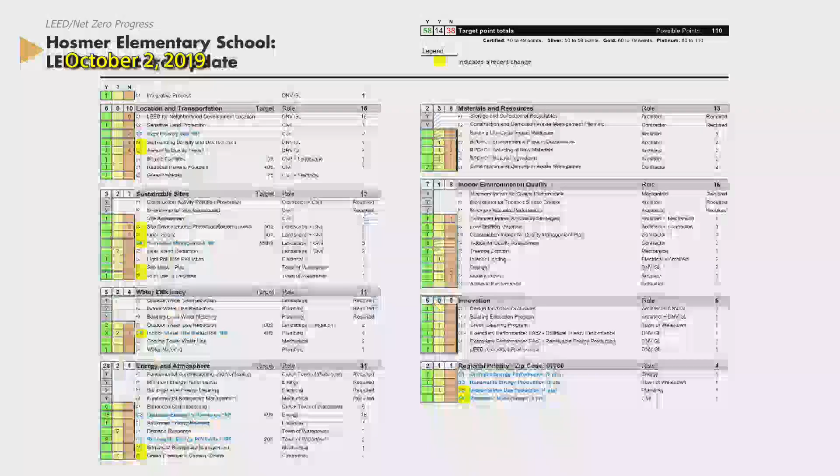We provided an update to the LEED scorecard for both the Hosmer and Cunniff to the Sustainability Subcommittee. If you look at the top right, we're currently at 58 points in the yes column for Hosmer, 14 in the question mark, and 38 in the no column. We want to push that yes column to around 65 to 67 points so that we have a buffer. Ultimately, the goal for LEED Gold would be 60 points, achieving 60 points, and as we've mentioned before, we need a little bit of a buffer.

There are a few things that we want to highlight to the building committee because they involve action by the town or they involve cost. So I'm just going to quickly go through and highlight those, not to go through the scorecard in detail. We're doing that with the subcommittee.

For example, if you go to water efficiency, we have 2 points in the question mark column that we really need to be able to move into the yes column, and that's going to require us to do a rainwater collection system in both the Cunniff and the Hosmer. We know that those systems are around $400,000 to $450,000 each, and they're currently not in the proposed project. So when it comes time to evaluate the reconciled design development cost estimates, we'll have those on a list of items for consideration by the committee because this becomes a fairly important point. It's not just the 2 points we get here, because this is a regional priority for New England and the Northeast, we get an additional regional priority point. So it's really 3 points, and you can see how significant that may ultimately be for the project. So we just wanted to highlight that we'll likely be coming back with more conversation around whether the Cunniff and the Hosmer should in fact include rainwater recycling, which essentially means all the rainwater coming down on the roof being collected, treated, and utilized in the restrooms within the building.

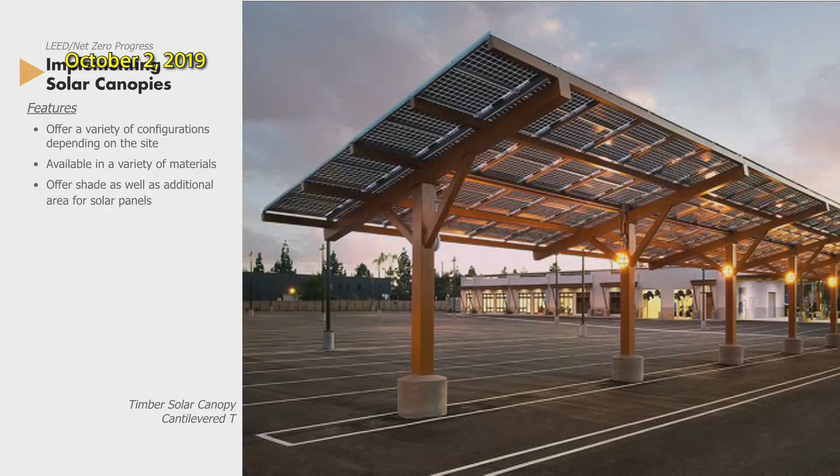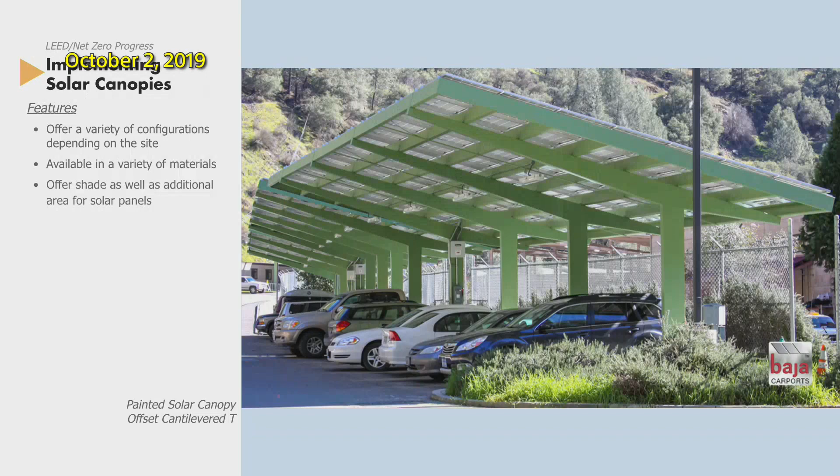And so when we're talking about those PV arrays on the site, we're talking about that kind of canopy.

That's a quick overview. As I said, we're taking a deeper dive with the subcommittee at the next meeting. So, but certainly any questions that the committee might have.

Questions from the committee? John? Question, actually, Scott, maybe just want to do that one correction on the Hosmer. Oh yeah, I'm sorry, that number's wrong. Yep, you wanna mention that?

Hosmer, there's an incorrect number right here. This 750 kW array produces just under 1 million, it almost identically matches the amount of proposed use for Hosmer. The 2.5 million is incorrect. The 750 kW array produces just under 1 million, or approximately the equivalent of what Hosmer would utilize per year.

And we did include as a handout for you to take a look at your leisure, an analysis that shows both the detailed breakdown of that energy use at Hosmer, meaning it breaks it down by the amount that's dedicated to lights in the building, the amount that's dedicated to heat in the building, ventilation fans, site lighting. So there is a breakdown in your handout that details that.

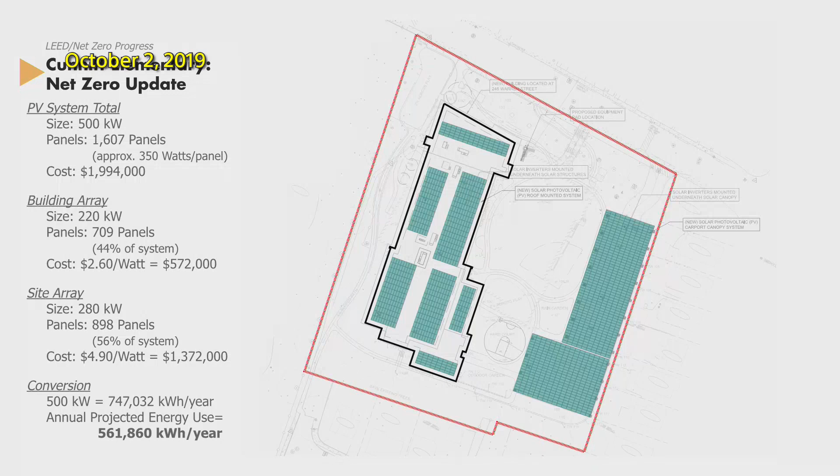Okay, and then just one last thing is, we talked a lot about preserving the view from Mount Auburn Street of the Brigham House. And one of these large canopies is supposed to go right along the front of the Brigham House. Have you modeled how that's going to affect the aesthetics of the view? We definitely would be able to show you that when we know what the design type is in terms of the kind of canopy, and then a little bit more about the size and magnitude.

Anything else, John? I guess kind of two questions. One would be, back on the discussion, which I know very little about, but you're talking about whether you do some kind of contract with some outside provider. You can, I suppose that's a way that you don't carry the cost yourself, but you arrange a deal with somebody else who's going to pay for it, but they get the benefit over a period of time, correct? Something of that nature? Yes. They essentially, greatly oversimplifying it, pay for the PV array, but they get the benefit of the power that's produced by it.

Okay. I mean, the building itself could still be considered a net zero building, correct? It doesn't change that. I mean, the energy, that's energy use. It doesn't, to say it's a net zero building is around energy use, not kind of who owns the energy per se. Or am I wrong on that? Yep, no, the way we have defined it thus far, not trying to wordsmith it, but the way we have defined it so far is that on-site, there would be an amount of alternative energy produced that would be equivalent to the amount of energy that the building is consuming.

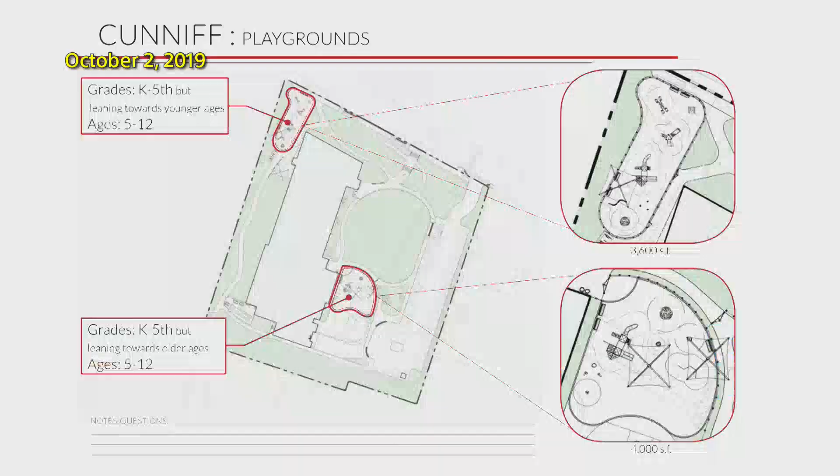Just very quickly, we had a really good meeting with DPW. Lori joined us, Steve joined us—I'm probably forgetting somebody—to discuss playgrounds. Peter joined us too. Is Peter here tonight? Yeah, Peter joined us.

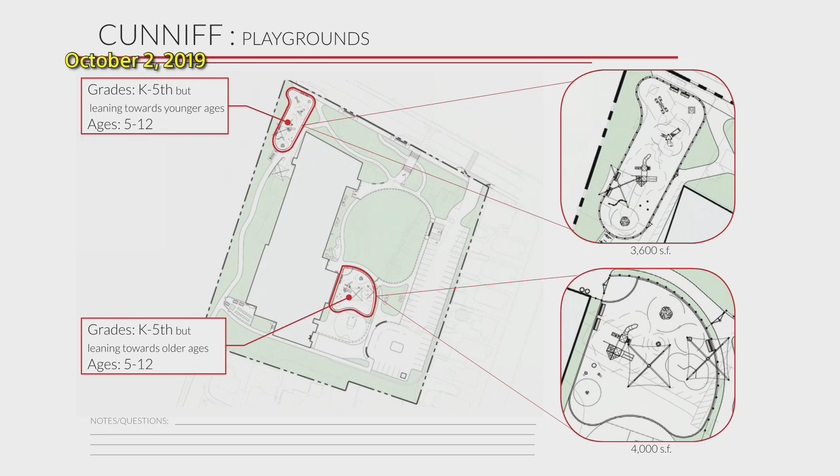It was essentially to talk about anything related to the playgrounds and get more information. We walked through all the playground locations with them, and through objectives related to universal design, along with comments we heard from the public and the committee about incorporating some unique elements into the playgrounds. They had some good ideas, and our team had some good ideas too. We talked about how they're maintained, ease of maintenance, and some preferences regarding equipment and surfaces. It was a really great discussion.

We talked about the sensory materials and the need for different textures throughout the playgrounds. And we found that Watertown does an excellent job being thoughtful in the way their playgrounds are done, staying current on what's available and what the current trends are, et cetera.

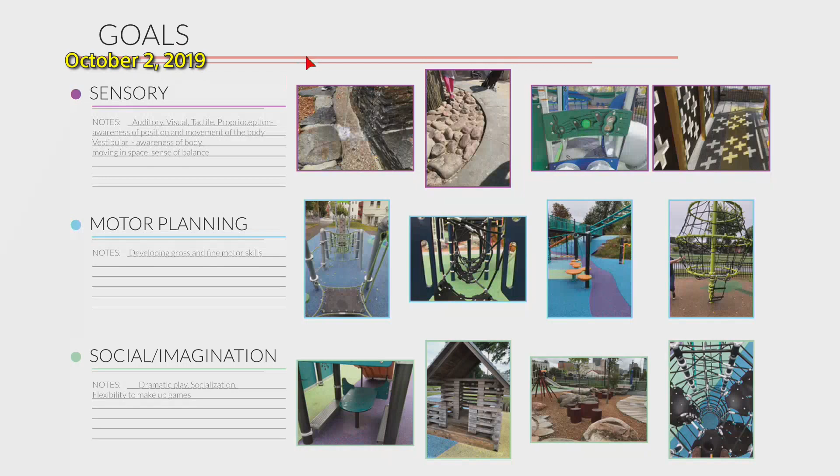So a great discussion that we were able to have around all the playgrounds and get their input. What we essentially agreed to do is a lot more design work on each of those, getting much more specific about equipment, finishes, organization, fencing and surfacing based on their input, and then go back to that group and have another discussion and get their input again, with the intent of coming back before the building committee with our proposed playground designs and revisions that are reflective of the input of that group.

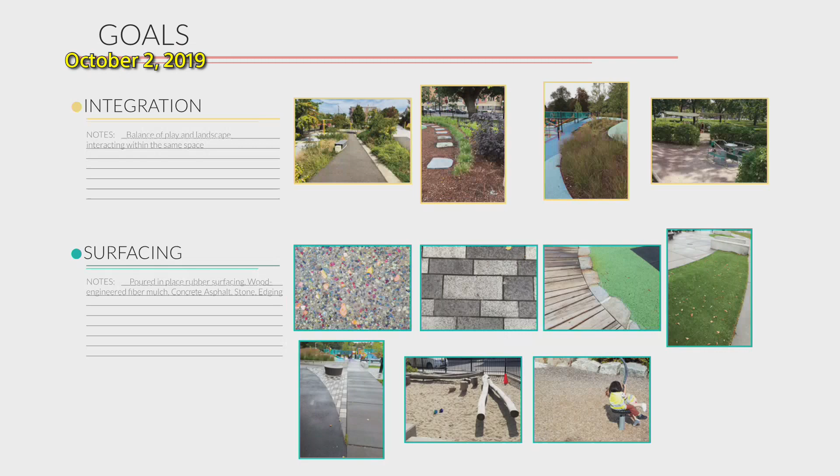Scott, on the Lowell I notice you just have the grades K, which is in the front. The town is considering doing the tot lot on the ball field part. Could we at least include that and get some estimates? Because it would make sense that we'd have the same type of equipment for all 3 elementary schools instead of using a different vendor and designer. Sure, it would just be a matter of letting us know, Tom, the scope, scale, exactly what you need from us. Just let us know.

Any other questions? John, just a quick one. Is the surface similar to the kind of surface we've been using, the rubberized surface? That poured rubberized surface is the preferred surface. It's the one that Watertown's had really good luck with maintaining. Anyone else? Okay, Scott, continue.

Just a little bit of a design update on the Hosmer and Cunniff. And for the Hosmer, I'm going to ask Julie Rahili from our office to talk through these few slides. So at the previous building committee meeting, we ran through a lot of the other spaces in the school, and we hadn't talked about student dining at all. So the design progress update for Hosmer tonight is purely on what's happening in that student dining space.

From all of the plans that we've seen, that exists - we don't have an overall plan here, but it exists where the two academic wings collide at this corner, with the athletic fields right at the bottom of the page. We wanted to show that the student dining space is large enough for 2 or more grades at a time for lunch, because of the option of the additional performance platform space. There's also a 30-foot opening here, which provides a sense of the scale and magnitude of the space we've allotted for student dining.

We've also provided a dining alternative space, which developed out of our programming meetings with staff and administration. That's primarily serving some of the students who are a little overtaken with sensory overload during lunch, but don't want to be completely quartered off from the rest of the school. So we're providing some kind of balance between being part of the student body and also having their private space. We've also included a storage space within student dining, and we aren't going to get into it tonight, but there was a little discussion in the sustainability subcommittee meeting on how, if we chose to go the dishwash route, that space could be interchanged to provide the dishwash space we would need.

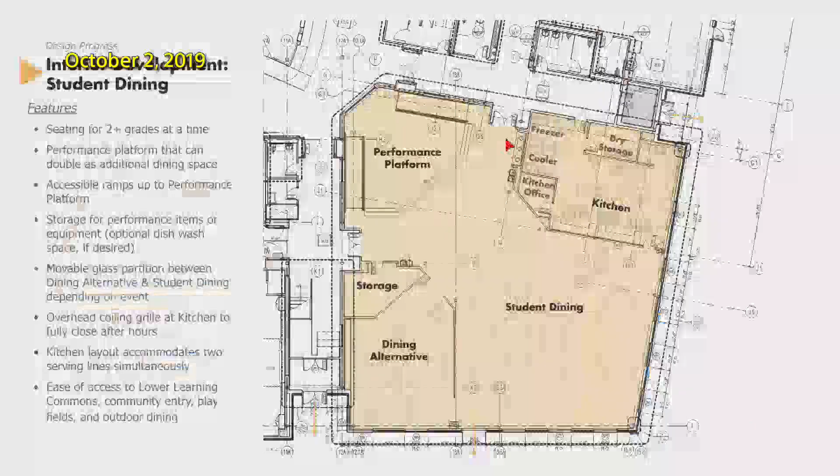A little bit on those areas, we're thinking by having the 2 entries into the student dining, that it allows for easy access from either academic wing, and then as students are starting to queue up to get their lunch, they're maybe filling up as they go, or as they leave, dumping some of that recycling as they return to class.

Just to make sure I understand, food deliveries and drop-off would come from the double doors above the dry storage, and then go in those double doors around, right? They would, yeah. We've also provided a door directly into the kitchen from that corridor. And then we don't show it here, but this is a purely staff toilet, so that would provide some services for the kitchen staff.

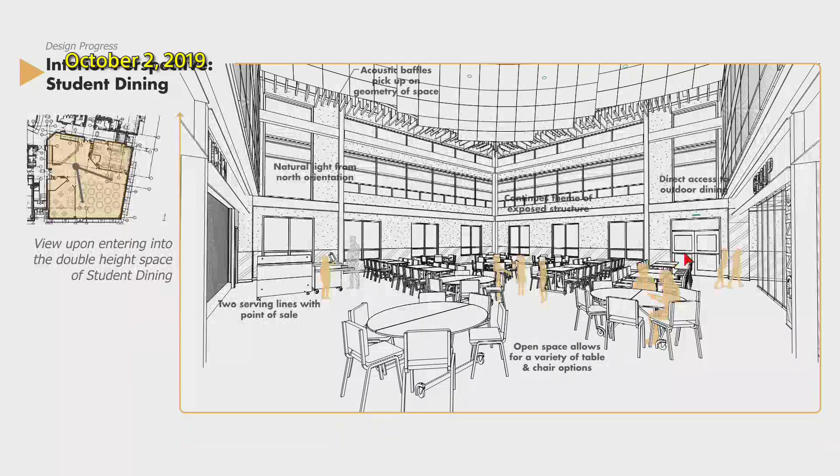And then a few perspectives of the space. This is as you walk in. If your vantage point is from that stage platform area, looking into the double height space, like many of the other spaces we've shown, we're maintaining a lot of natural light. We're exposing structure. The way the space itself is configured allows for a lot of variety with table and chair options. And we also can see the direct access to the outdoor dining from this view.

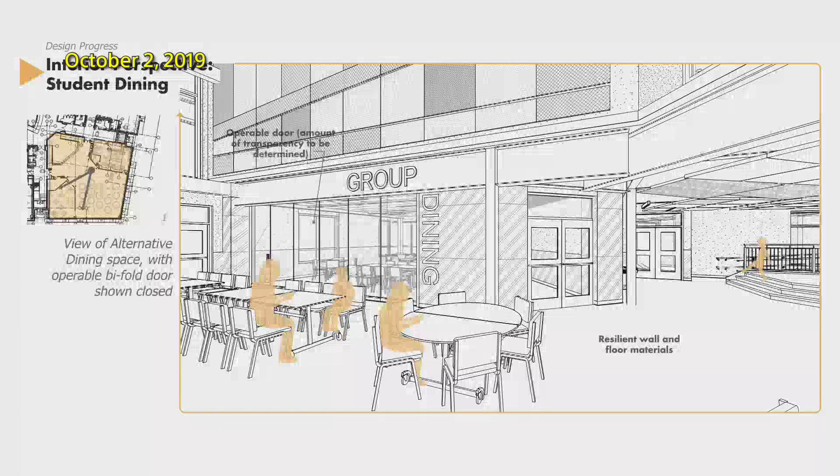And then this is a view looking towards that group dining, alternative dining space. We are planning to have some sort of operable door, and we want to reach back out to the administration to get more information on how they're seeing the public versus private, or the amount of connection that we want that space to have to the larger dining space.

And then this is just a view showing that if we do incorporate an operable wall there, then after hours, or if there's some sort of special event, we're not losing that space to the rest of the dining area.

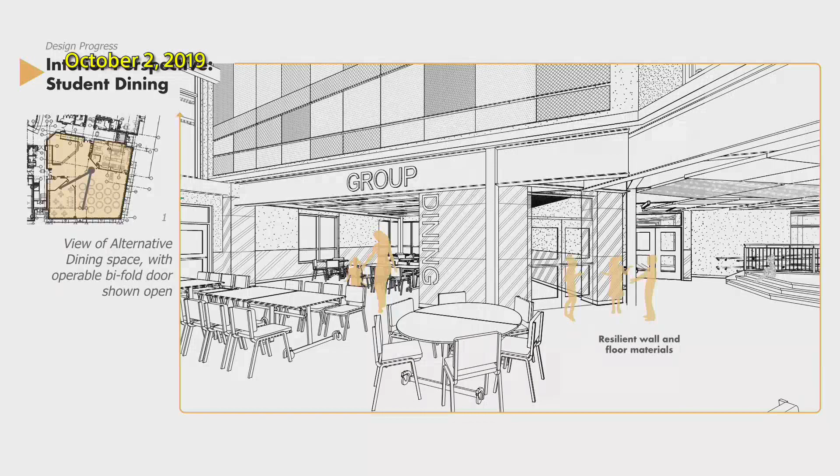And then this is just an additional view looking back into that space, which would also be really great for meeting space or during events, just to have an additional conference or gathering space. And then we're also maintaining that transparency and connections into the academic wing, just to keep it fun in that academic zone on the second and third floors.

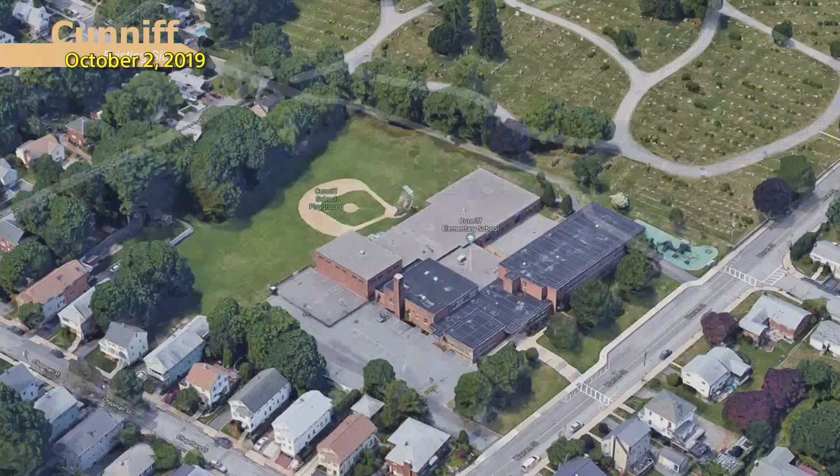Reading the rendering correctly, the performance platform space is a single height space? It is. And is the headroom condensed due to the step up for the stage?

Slightly. We didn't want to, so we're showing two lower steps there, primarily just so that if the dining space required additional seating, or if they wanted to use that during the day for kids to eat at as well, it wouldn't seem so separate from the dining space.

Roughly, what do you think the headroom clearance is there? From the stage to the ceiling there? To the drop ceiling? Probably 9 feet. 9 feet? Oh, okay.

Kelly? On the interior perspective for the student dining, for the ceiling materials, so you're calling for the baffles, is it just at that front perimeter? It is. Okay, what material is that? What product? So we've been referencing the Armstrong acoustic blades, soundscape blades.

Okay. We are interested in using them in a similar manner at the other featured corner spaces of the building. Okay, and so then you've got, hold on, what perspective was it? The acoustical ceiling radiating from the performance corner. And then is there a reason why we're not just continuing that and it's stopping at baffles? Just curious. Sure.

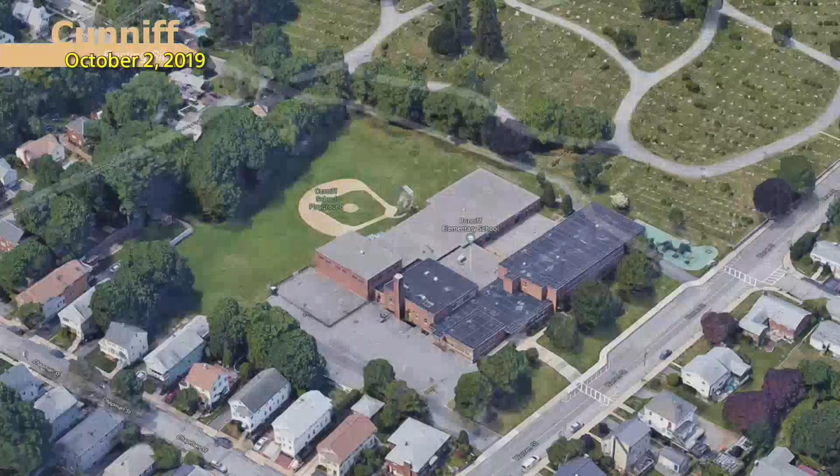Similar to Hosmer, the Cunniff slides will focus on the student dining and kitchen, plus a slide or two on the exterior to show another angle of the west elevation. The student dining is on the first floor in what we're calling Zone 1, shown in the key plan on the top left, highlighted with an orange rectangle.

Some features to call out: the Cunniff student dining also has the capacity to comfortably fit two-plus grades at a time. The tables shown are just a loose early fit; the final design would have a larger configuration with different size tables, giving more seating options. Right now you're seeing about 120 chairs, not including the performance platform, which could double as more seating. That square footage could probably accommodate another 30 to 50 students if you wanted.

To piggyback on what Julie mentioned about the ramp and the step, another reason Cunniff chose to utilize one step rather than two or three was because of how the building was set up. It made more sense to have the ramp oriented north-south as shown, and the only way to achieve that was to minimize the length, which in turn minimized the height of the platform.

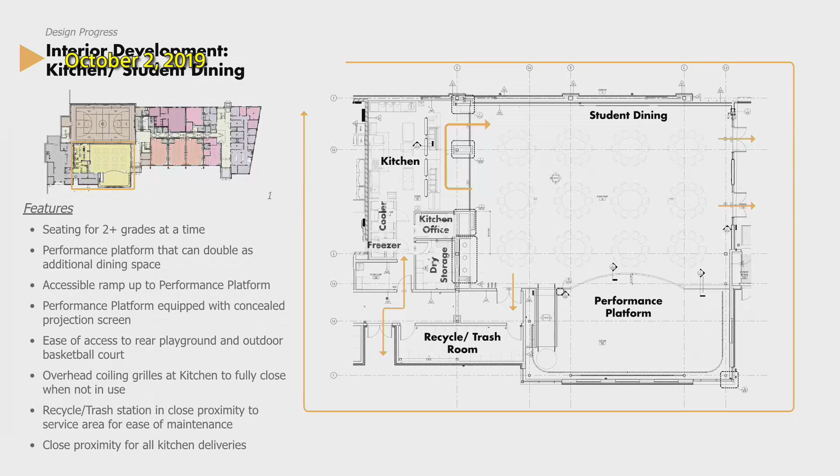We'll cover more of the kitchen in the next slide. Again, similar to what was mentioned for Hosmer, our consultant from Crabtree McGrath was talking directly with Brandon Rabbit, the director, to confirm we'll have the right equipment and program spaces to meet any serving needs the schools are requesting.

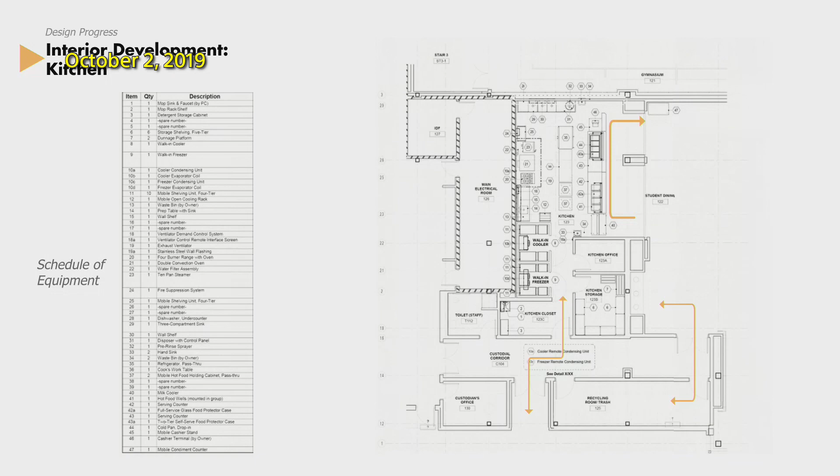Again, a walk-in cooler, a freezer, an office, dry storage, et cetera. To Lori's point, I wanted to bring up the path—this orange here—for any deliveries. It's important to note that directly left of these double doors would be the custodial suite. The reason food wouldn't come through that door is best practice to not mix a maintenance delivery with a food delivery, but also because we like having more of a straight shot for the kitchen needs.

The features on the left remain the same, but I wanted to show some elevations of the space before hopping into any perspectives.

Following the general theme of the building, there's opportunity for educational signage, opportunity to express more structure, safety and security with overhead coiling grilles, opportunity for wall graphics, and adopting an aesthetic with wood panels or acoustic panels. On the bottom left is a view looking at the performance platform, showing the large expanse of glass welcoming a lot of natural daylight.

I know I'm going really quickly, so if anyone has any questions, I could pause. Anyone have questions at this point?

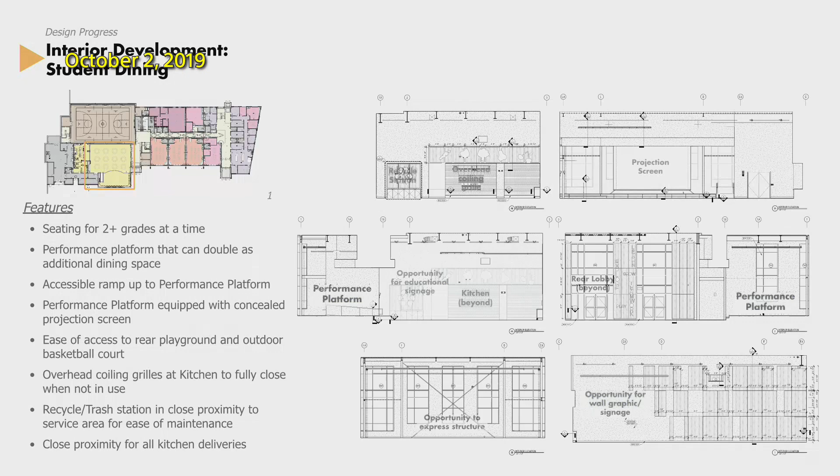This next slide is just another detailed look at some of the behind-the-scenes development, coordinating with structural, mechanical, signage, et cetera. This shows the recycling station and how we can integrate that within the structure rather than building around structure, plus opportunities for educational signage or branding. This is usually a high priority detail to uncover early on for the trash and recycle room, to make sure it would actually fit the used trash containers.

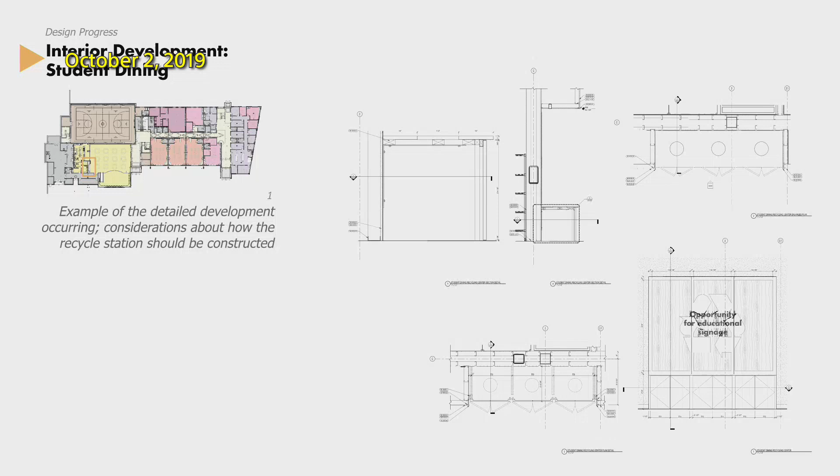Looking at some perspectives, this is standing from the rear lobby looking towards the kitchen. I won't repeat the features as much, but you can see the safety, security, structure, et cetera. The only one I'll call out is the curvy thing on the wall that someone brought up - that would be the concealed projection screen.

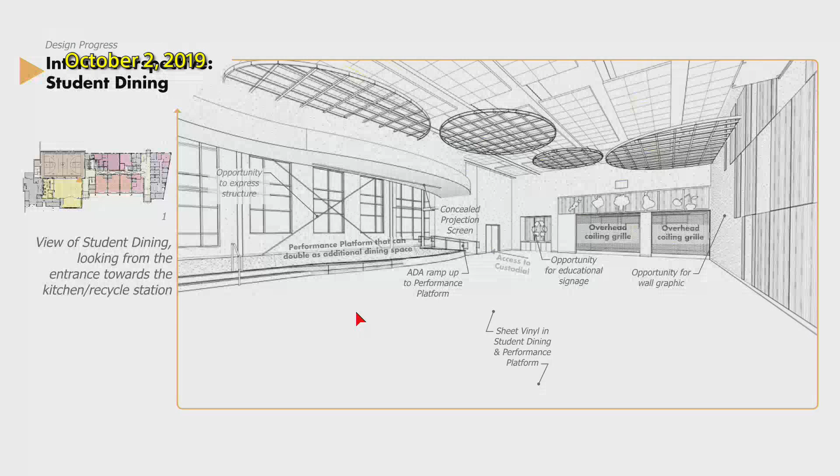And this would be standing from the kitchen looking towards the rear lobby. You see the ADA ramp on the right, and more opportunity for structure or graphics to be expressed.

One main visual to point out here is the transparency to this lobby and the visual of how we can connect these two floors, the first and second, having the open stair. Some of the finishes we're showing to enhance the space, rather than wall-to-wall ceilings, are ceiling clouds and open grid clouds just to have some pops of color.

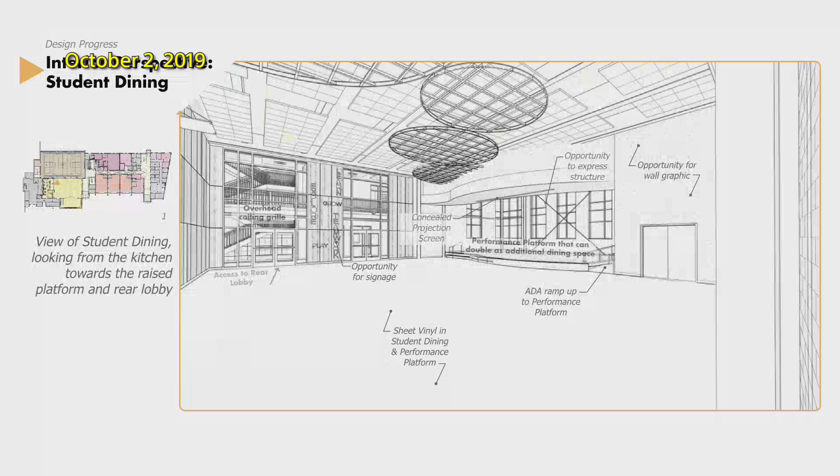Should I wait? Anyone have questions on the kitchen at this point? John asks: just kind of generally, right now the kitchen has what, like 3 sinks in it?

That's what the Hosmer had, yep. It's kind of a standard configuration - wash, rinse, sanitize, or soak, wash, rinse.

And if we were to go, which we talked a bit about at the subcommittee, to a more extensive washing component of trays or whatever else, would that be able to fit in some fashion in there, or would you have to redesign that kitchen? There would be some redesign, but those sinks would remain as part of a health standard to begin with, while the dishwasher itself would have its own separate room - about a 10 by 14 room would be required to accommodate dishwashing. We'd have to find additional square footage somewhere in that layout.

Leo asks: is there any benefit to visual control from the kitchen office, either into the kitchen proper or out into the main student dining area, or both? For the scale of this kitchen, I would argue no - the kitchen office is remotely located within the kitchen, and typically they wouldn't have oversight of the student body. That was a question I had for the Hosmer as well, because you have the option of viewing into both from the kitchen location there.

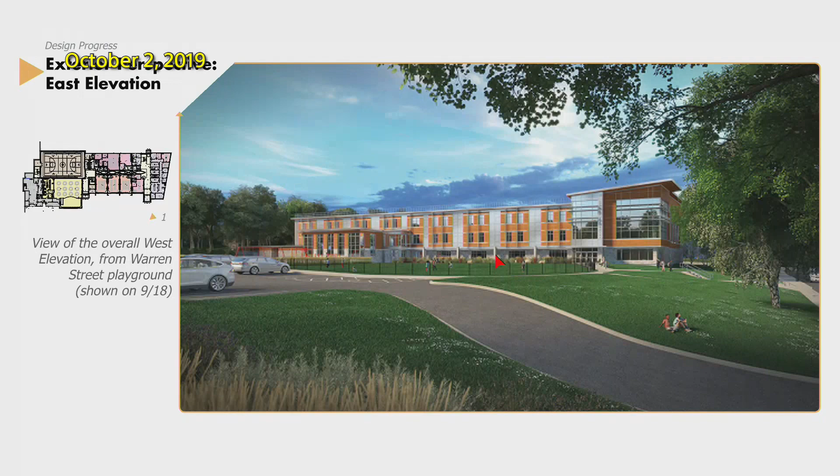This is another angle of the west elevation. Previously, we've shown a sharper angle, so you couldn't see much of the elevation. So the importance of this slide was just to show the rhythm and the harmony between the east and west elevation and how the material palette will work on both sides.

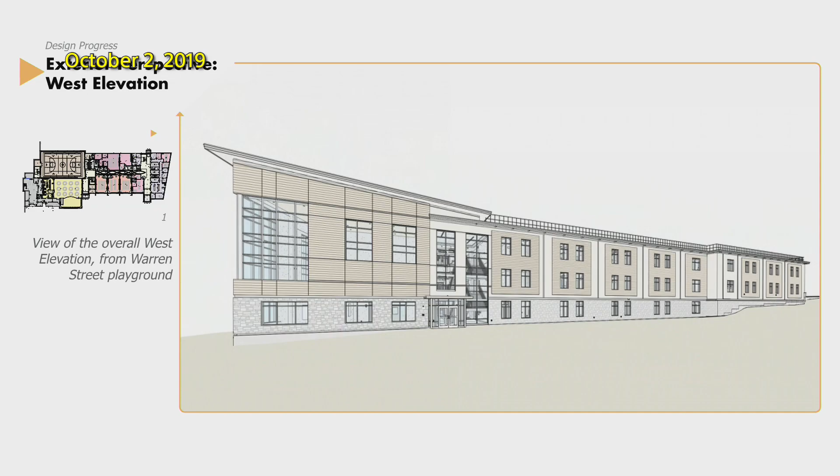Leo: I just want to reiterate my concern about the material choice of the aluminum specifically. The rendering is representing what I think is probably accurate, but this will be a very bright, kind of specular aluminum, which will bounce a lot of light as well, so I'm just reiterating.

It's also important to note, too, just for this simple perspective, there are a handful of trees along this path in the cemetery. Not to sway anyone, but that was all from kind of a concern.

Question, Kelly? Can you just speak to the railing on the roof? Is there a way to set that back so it's not as visible? I mean, I'm assuming we need it because we're going to have some PVs and it's going to need access, but if we're not going to do a parapet, that could be quite an eyesore, so we might want to just bring that back a little bit.

One strategy that we typically take, too, is to paint it white. This is black at the moment, but when we paint it white or a sky blue, it tends to blend as well. Yeah, even on the rendering, it just isn't reading great, but just something to consider what the view would be from the street.

Okay. John: I just want to follow up on Leo's point. I'm not sure, wasn't clear about the metal issue that you were raising. You want to clarify that, or is it on the back side or the front side or both?

It simply has to do with the tonal palette that you're compiling here. I've asked Scott and his team about the wood tones and the metal tones, and I don't know if we've landed specifically, but the metal example that was circulated is almost like a true anodized aluminum. And I don't want to put words into your mouth, Scott, but please, if I say anything that's not accurate, please just correct me. But my understanding is that it's a very kind of bright, true aluminum color, and so that metal will bounce light and be reflective.

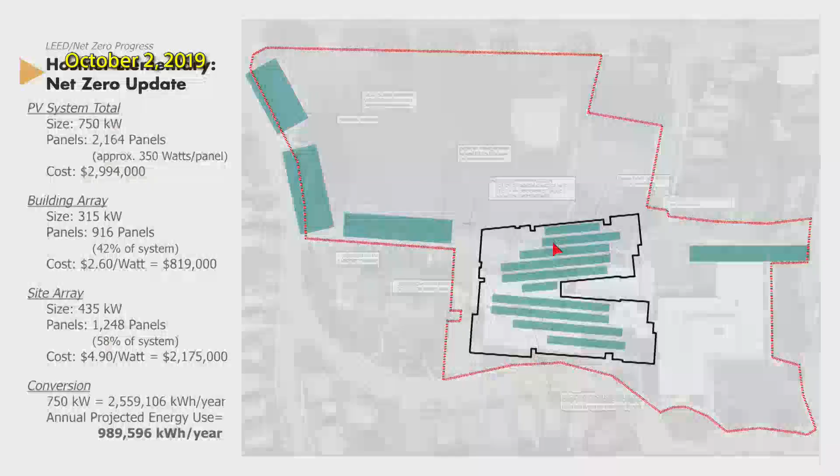On the building roof itself, they are being proposed to leave room for them to shed snow, more for efficiency for the unit itself. You shouldn't ever be in a position where you'd have to shovel snow off these roofs, as a result of some really significant modifications made to the loading requirements for a roof in the Commonwealth now, following some older roofs that did fail. So these have to be designed for a significant amount of snow - it ends up being the equivalent of 8 to 10 feet of snow on the roof, just as part of the new structural code loading requirement for roofs.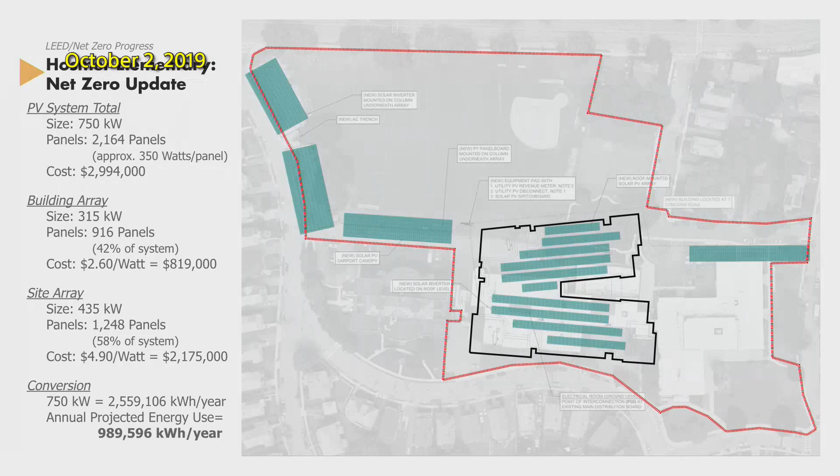Any other questions? Does that conclude your presentation this evening? I believe that it does conclude our presentation. I just want to make sure there's no surprises at the end. Perfect.

Thank you. The next item is the Sustainability Committee update. We've done some of that here. John, do you want to add to that? No, I think Scott already went into a little bit more detail, particularly on the LEED side, but we'll continue to do that. I think the big issue for us will be coming back to some of those concerns that Scott raised at the beginning that are going to come back to the building committee as a decision point - do you want to do this or not? So we'll try to look at those next time.

Any other questions on sustainability? Okay, review and approval of invoices. Mr. Tracy sent out all the invoices, and I'll recognize Tom at this point. Thank you. As Mr. Sears just said, I sent them out this afternoon.

We have in front of us tonight, for the three elementary school project, invoices for AI3 Architects through the period ending 9/30, totaling $1,624,688.84. We also have, through the period of August 31st, Hill International invoices totaling $35,450. And on the high school project, we have an invoice for Compass Project Management totaling $16,790 for the period through August 31st.